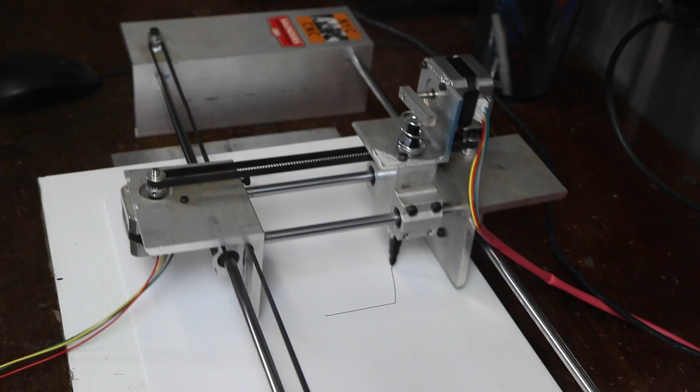For fun, let's take another look at drawing out that logo again, a little closer look at the machine. You remember last time, we basically did the same thing, except we didn't have any way to lift or control the Z-axis. Now you are getting some jerkiness in the text here. I'm going to talk about that a lot during this video because there are ways to improve it both in this design and the next machine.

I'm also okay with it because the point here is this is an incredibly inexpensive machine. And look, just how cool is that, folks? Just freaking amazing. And the only time we really had problems is when you are coming in and out of a curve or you're running two at once. And honestly, a lot of it has to do with I've just got too much slop in the, especially the Y-axis that's traveling along the X here.

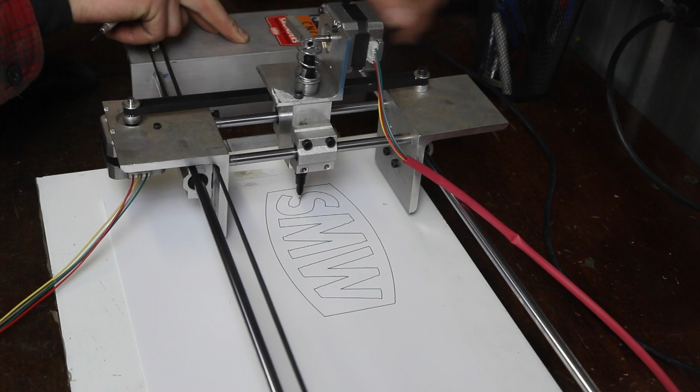So you can see I can move that, and as that drags that tip, and this has a little bit more friction than like a felt tipped fat Sharpie, it's just creating that wobble. The easy solution would be to have two instead of one of these little ball screws along the X rails, so making these brackets wider wouldn't be a hard thing to do, just didn't happen on this machine. But super amazed. So let's take a look at both this little Z-axis plunger system and then ChiliPeppr.

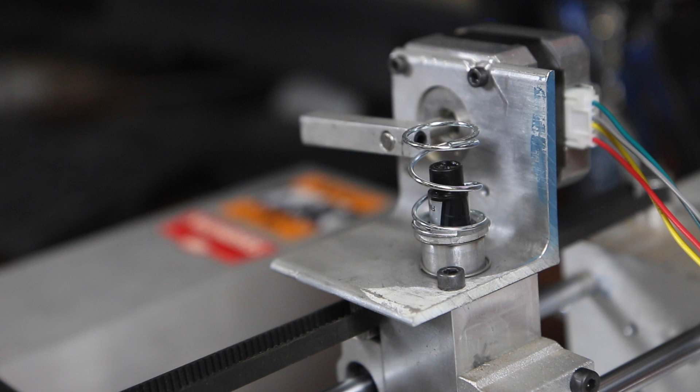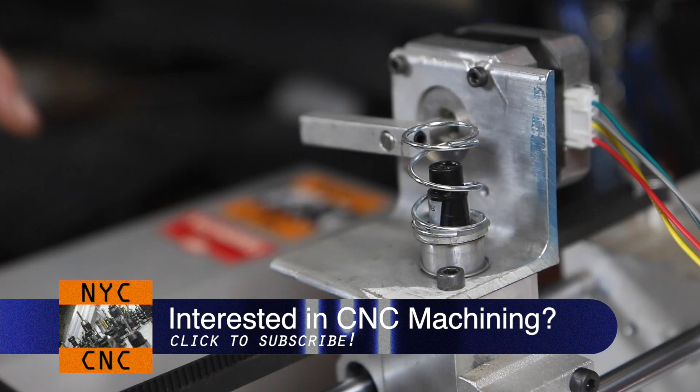I put a lot of thought into this Z-axis pen mechanism. I wanted something that was simple, but I wanted it to be reliable. And what I realized was you're going to need basically two springs, and here's why. This bottom spring here, the thinner one, its job is to lift the pen way off the paper when you need to rapid between positions so that the pen is not coming close to touching the paper. So that's the sort of binary down or up position, if that makes sense.

But we also need a second spring to accommodate for the cushion of a lot of things, of the felt tip of the pen or whatever type of pen you're using, and for the exact position of this arm that we're using on the stepper to activate it, and for undulations or uneven surfaces in the paper or material itself. Because if you tried to take the hardest example, like an actual little ballpoint pen, you would basically have to have exact, constant, even pressure, and that's really hard to maintain across much of a surface. So again, nothing complicated in the end.

This is what I came up with. We've got this machined sleeve, and that's what holds the pen in it, and then we just glued this heavier spring on top. I'll go ahead and move the Z-axis down here, G01 Z-6. You can see we've fully compressed quite easily the low spring, and then the high spring has tension on it, which will allow the pen to move over the paper pretty evenly.

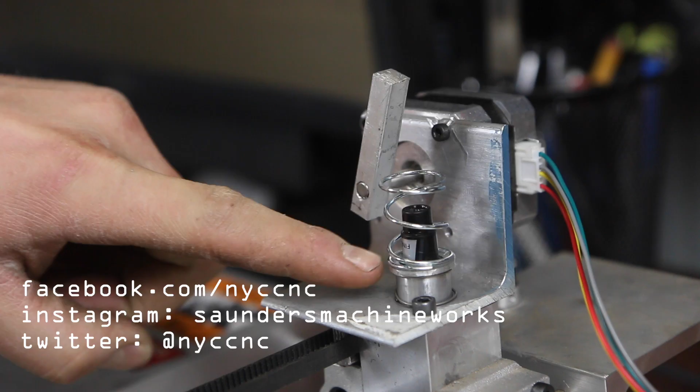I also just like it because it's simple. You can basically put any sort of pen that you want inside of here. This one is actually just secured right now with wound up electrical tape for friction fit.

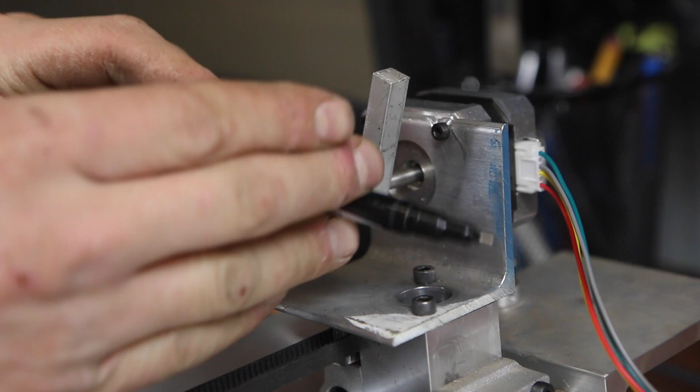I would actually recommend gluing one in there because that's going to provide an even tighter fit than this pen's got right now. Another probable reason why we've got a little bit of wobble in the drawing. So what we're going to do is we're going to sell this little Z-axis kit. It'll have the angle bracket here machined so that you can put in your stepper motor, this little piece here, and then the bushing with the two springs. It'll also have the block here.

So you should be able to basically just hook it up to your system, whether you buy it or make it yourself. And what you can do then is we'll also sell extra bushings, so they're not going to be expensive. And if you want to make dedicated bushings for each pen, then you're good to go. Quite simple. Again, I think it's a good way to go, but tape will work fine in a pinch.

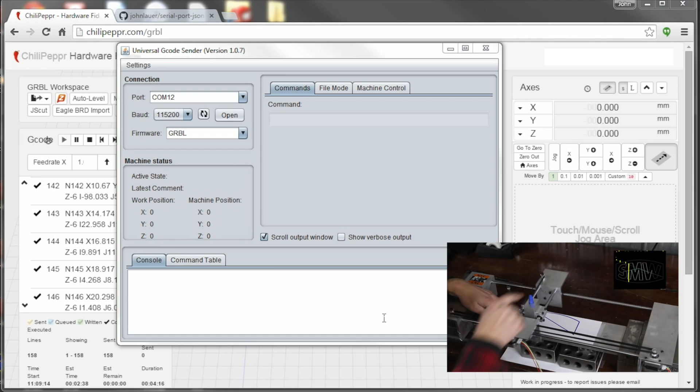Let's talk ChiliPeppr. As you guys remember from the last video, we were using this Universal G-code Sender. No complaints, God bless them, it worked great, but folks have mentioned in the comments, check out ChiliPeppr, and folks, God bless you, it is unbelievable. The GUI's right here. Before you can use ChiliPeppr, what I want to do is show you how to get it running, because just like the GRBL and other stuff, it's not hard, but a couple tricks.

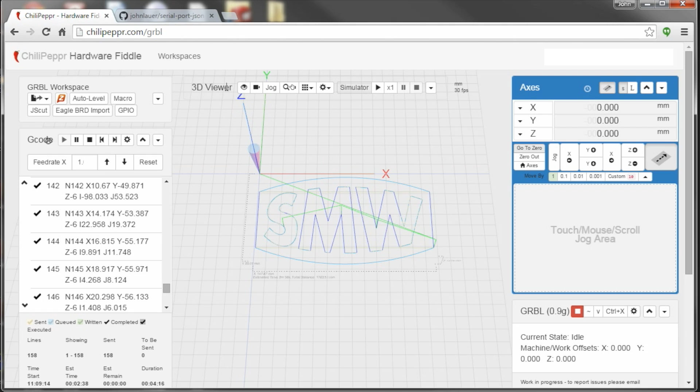What you need to do is Google or go to the link in the video description for this Serial Port JSON WebSocket. Sounds complicated, don't worry about it. Don't overthink it. I honestly read almost none of this. Just go to binaries for download in Windows or Mac, whatever, 32 or 64-bit. You download it. It's just an executable file.

When you double click it, you get this little screen right here, and it lists your 2 serial ports. You'll see Arduino Uno and then on COM12. So, sorry, and go to ChiliPeppr, you can see it's right here. We're using it on GRBL.

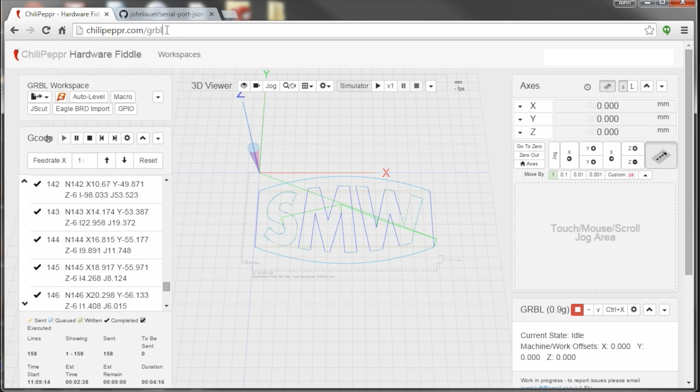Good time to mention, I know folks have been frustrated that the GRBL shields are right now sold out. They've been incredibly popular. I talked to the folks at Synthetos. They're just experiencing growing pains. I think they're moving one of their vendors or something. Definitely expect them to be back in stock, so don't give up hope.

They make a great other board. It's unfortunately a little bit more expensive. If you're really rushing to get going, check out TinyG. Again, it's more expensive, a lot more powerful. I've got one in my drawer I've been anxious to play with, but it is available if you can't get your hands on a GRBL shield for now.

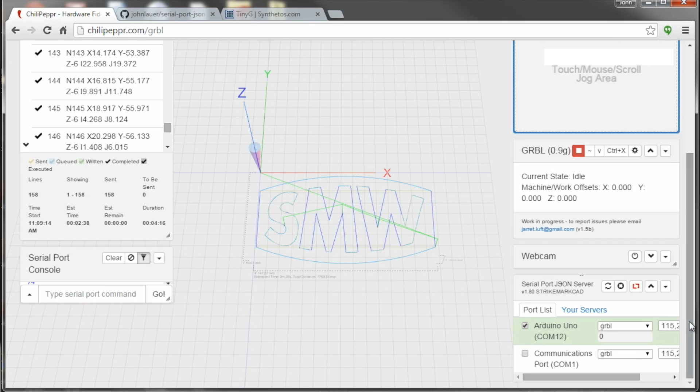So one of the things you'll notice is you've sort of got these workspaces or widgets or whatever they call them all around your center area with the CAD file itself. So real quick, I haven't played a lot with this stuff, but it's amazing. I mean, look, it can send you a text message when your job is complete. If this is a really long, like a 3D print job that takes multiple hours, that's pretty darn cool.

A couple of little things here that I don't pay attention to right now, at least. This is how you start, stop, and rewind the G-code itself for the file. We'll come back to that. And then on the bottom left, this is what I call the MDI, basically where you can type, say G01 X100 F5000, enter, and that'll manually control it.

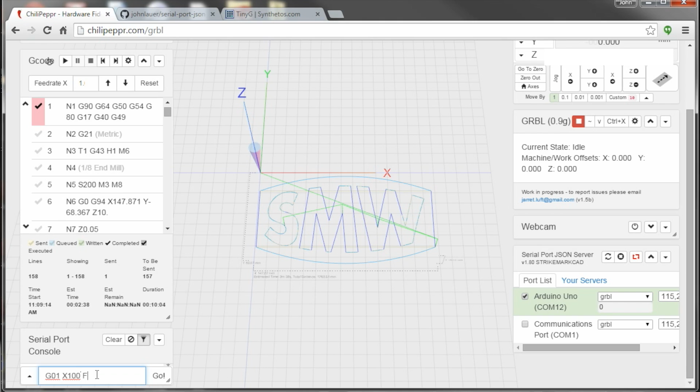On the top right, you've got your axes where you can zero them out, go home, or manually jog. The jogging is a little strange, but if you click on jog, then the keyboard will let you jog, or you can expand this thing, which is a mouse scroll area. It's interesting, but I don't know if I love it.

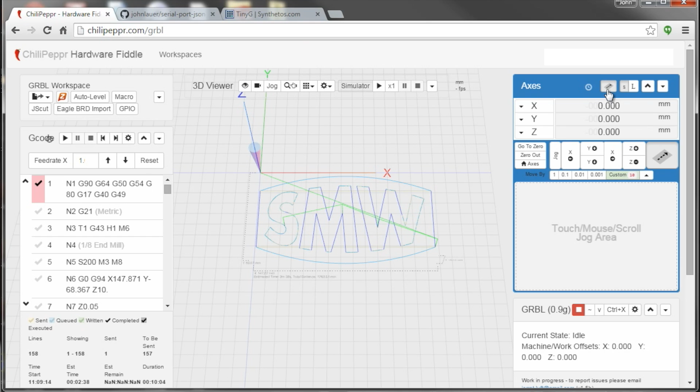You can change your jog increments. You can jog by clicking on here, set custom increments. It's great. I don't want to complain, but something's a little quirky to me about it. Very importantly, here's where you control the GRBL itself. You can do a soft reset with that button.

Clicking on this button pops up those settings that you used to have to deal with in sort of that DOS equivalent setting. They have warned you that it may not work perfectly, and I actually did have to check it a couple times. It didn't hold the settings. But now is a great time to go look at it.

We're using NEMA 17s. Links are in the video description. And you can see, we're doing 8 microsteps on the GRBL shield itself, which means there's no jumpers across those pins. And then you can see, I think the only settings I had to change were these for the steps. And if you guys remember, we had that Excel file that I shared from the first video. And the math is quite simple.

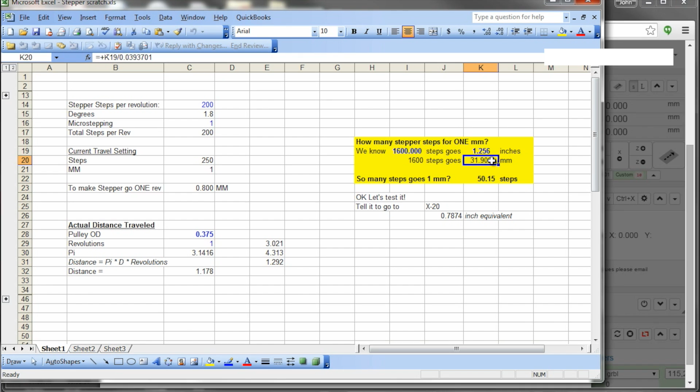We say 1600 steps, that's 1 revolution, because we're using 200 step steppers, and we're micro stepping 8x, so 8 times 200 is 1600. That on my machine went 1.256 inches. I literally just measured how far it went. That means, in the metric equivalent, 1 millimeter takes 50.15 steps, and that's the equivalent there.

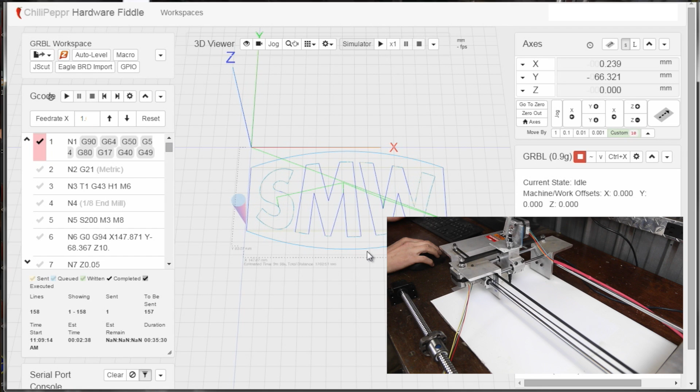Okay, let's spend a few more minutes in GRBL taking a look at some pretty darn cool things it can do. First of all, you see you can click control and it jogs to that point. So control click, boom. How cool is that, folks? It's just incredibly useful. It's just amazing to me. Now we want to go back to 0. Actually, to show that off, go back over here and we can click go to 0.

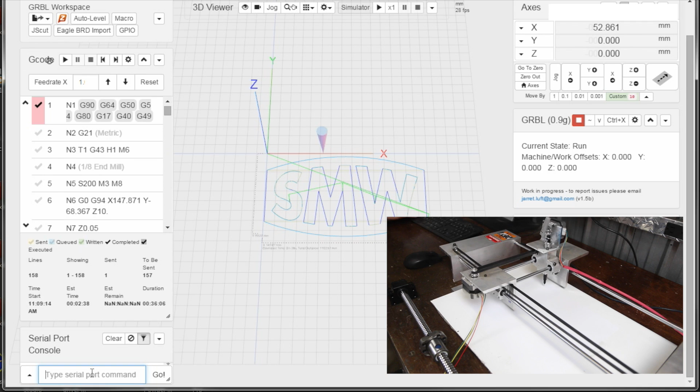Now, one of the things I spent a lot of time trying to get was this smooth motion, and we'll take a look at some manual code. You can see if we type in G01 X150 F1000, it's not going to be as smooth. Well, I shouldn't say that, but you can see it's kind of got that hum to it. Now we type the same thing, go back, G01 X0 F6000. Listen to this. See how much nicer that is?

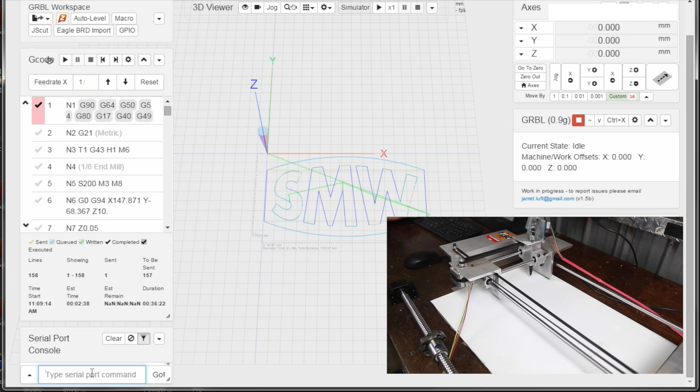Now it's probably just the pulse rate. Someone might chime in on what the expert reason is, but I basically like how smooth it seems at that higher feed rate. So let's do this. Let's really quickly show off how we can write a basic G-code program so that folks can understand how simple that is. So we're going to start, there's two different commands.

G0 is rapid, and G01 lets you control how fast you want to move. So G0 is going to move basically as fast as the machine lets us, which is the setting we defined right here. So in our notepad file, we're going to type in G0 X0 Y0. In fact, what we're going to do first, make sure the pen is lifted up. So G01 Z1, I think was what I was using. Let me take a look. That should be fine. So that lifts the pen.

This puts us to the home position. Now we're going to put the pen down onto the paper. So G01 Z, for me it's -6. We'll just do F750. Then we're going to draw a box. So G01 X175. That'll go right 175 millimeters. And we're going to set that at a feed rate of F6000. Now, G01 Y-75, we don't need to type F6000 because it'll carry that through until we change it again.

G01, X0, G01, Y0, and then we'll lift the pen up again. G01, Z1, F750. We'll save that. So now here's what's really cool about ChiliPeppr. We're going to grab that file and just drag it here, and it's going to drop it in, and it's

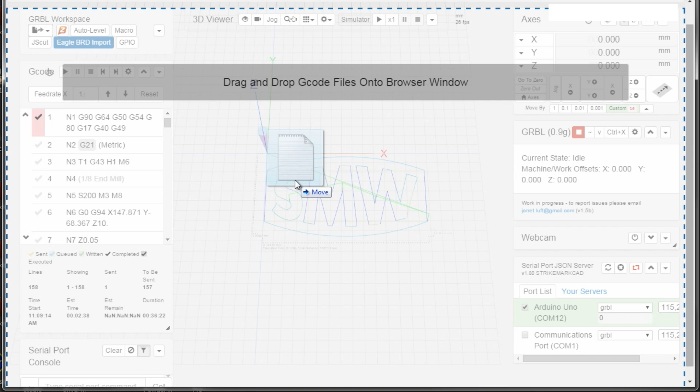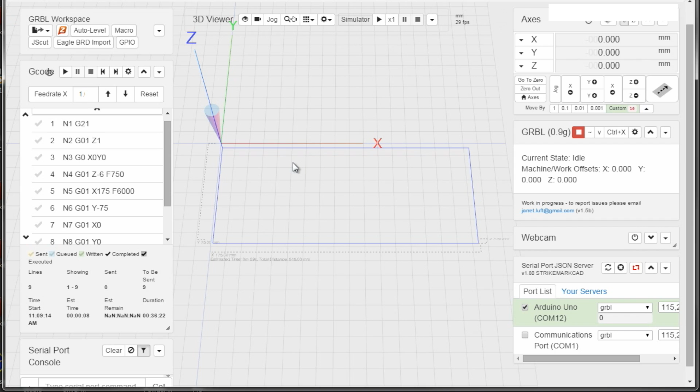going to say, hey, one of the things you need to do in G-code is tell me whether I'm dealing in millimeters or inches. As a layman, I'm kind of like, I don't want to deal with that stuff. And so what it does is it automatically will add that for you. We're in millimeters, boom. And if you look, there is our shape. How cool is that? So without further ado, let's see what happens. Well, actually, we'll start in here, so it'll go back to the home position just to show that off.

Pretty cool, right? Okay, so again, you see the little variations in that line right around the corners. So that could be, like I mentioned earlier, improved with a little bit more rigid axis. But the other thing I wanted to mention, folks, is the next project I'm super excited for is we're going to build a same type of machine, but way more rigid, really a proper almost CNC type machine that we're going to use for, well, I'm excited. I'm going to keep it a secret until we come out with it.

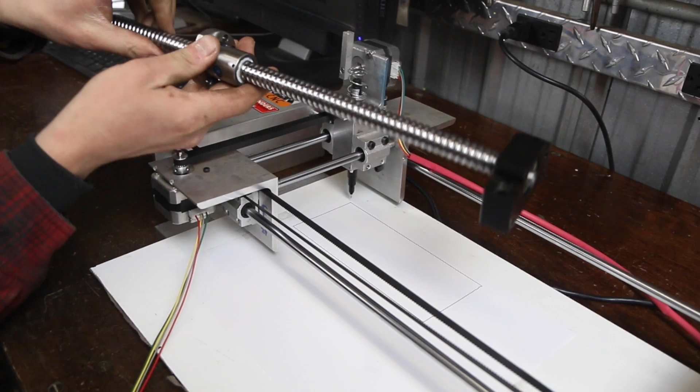But we've got a nice ball screw here. These are preloaded ball nuts that are very low backlash, very precise ground things. These are what you see in machines like Tormach's. And we're going to use linear rails. So these, again, have ball nuts in them. These are hardened ground rails, and they're low friction, so they slide back and forth real easy, but you can't twist or move that at all.

So completely different machine, but you know, one of these alone is more than all the components in this thing combined. And that's okay, because it depends on what you're trying to do. But I love this little machine as something that's fun and pretty darn accurate for what it is, easy to put together. You know, one of the coolest uses I heard about from folks is they put in one of those resist pens and they're tracing out copper clad with this machine to then acid etch into circuit boards. I thought that was pretty cool.

Before we wrap up, I did want to show off some close-ups of the machine. Some folks had questions about assembly and parts you need, so let's take a look. When you purchase the parts list of items that are in the first video description, you'll get the belt, you'll get the little pulleys here. Those fit straight on the stepper shafts, and you just need the M3 screws to fasten your steppers through the plate and into the angle.

The end over here is just a 10-24 screw. It's not a shoulder bolt or anything more precise. I found it works great. And then if you purchase the Z-axis platform, these are M4s. You're supposed to use 4 on each. I've only been using 2, which is fine. We'll include the little clamp and the fastener that attaches the cable to the Y-axis. And let's see here. I think that's about it.